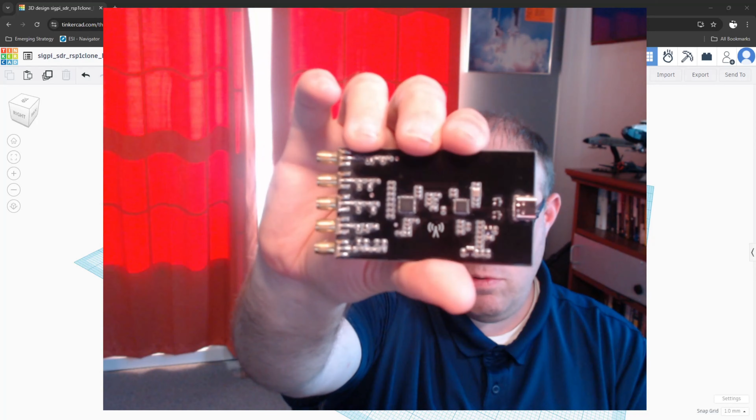So why? What is the reason for the video? Well, this is the reason right here. I bought a few of these a couple years ago, probably on eBay. I think I bought these.

From a specification perspective, you have a USB-C interface, and then you'll notice you have 5 SMA ports, which for this board is receive only. And this board has a lot of controversy behind it.

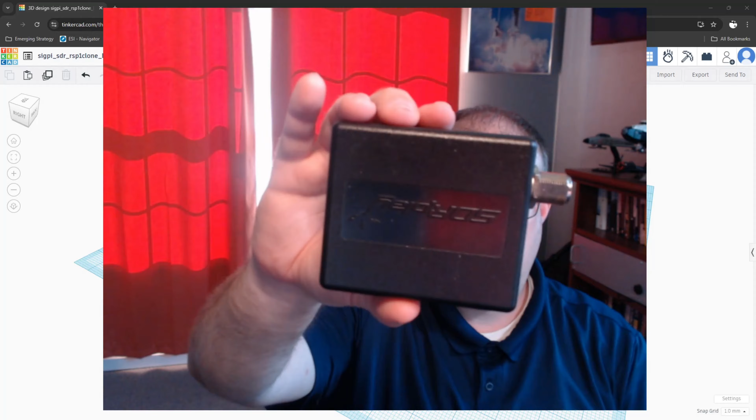And so this all started going back to the SDRplay. This is the SDRplay RSP1. Normally it comes with an SMA connector, but I replaced mine with an N connector, which is a separate conversation altogether. But basically this is the same, minus a few things, as this.

And so this board, somebody released the design freely on the internet, and then somebody in a particular country copied it, and then they took a copy of that schematic and used it as part of an academic project. And so I think while it started life in the best way possible, it has developed a bit of a cult level of annoyance, which I agree with, and I'll get into in a second.

But in order to simplify the costs of this, when this was still in academia, I believe what happened was they designed this as a teaching tool. And so the reason why there's 5 antenna ports is that this proved a great way to show about bandpass filters.

And so each of these strings of — let's see if I can get up in here. Yeah, you can't really see it too well. But there's a row of inductors and capacitors in here, which forms an LC network known as a bandpass filter.

So each of these ports can only receive signals between the parameters of the bandpass filter. So this top port will go from 120 to 250 megahertz, 250 to 1000, 50 to 120, 30 to 60, and 0 to 30 megahertz.

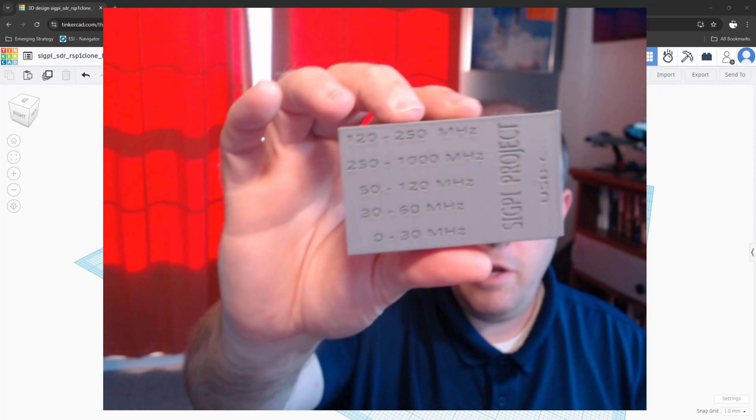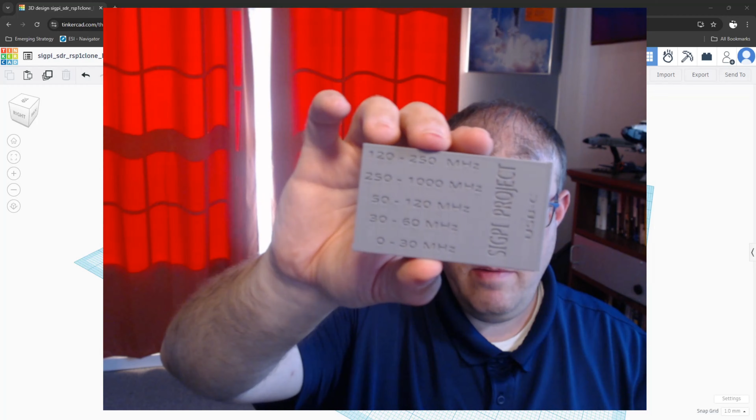In this case, I used Tinkercad and I 3D printed them. Ultimately, I got a really nice design, and I'll share it. Here's what I came up with. It's a two-part design, and I'll show you some tips and tricks in the 3D printing design process that took me from a raw board to having a case for my multiple SDRs. So let's switch over to Tinkercad now.

Turn off, there we go. All right, so...

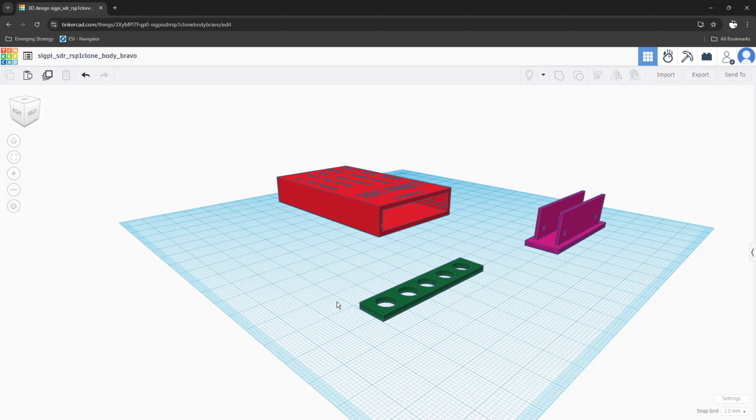Having designed lots of things in CAD, I wanted to make sure I took accurate measurements and didn't want as much waste in prototypes. So I really thought about the board itself and what was going to be most complicated. I thought the thing that's probably going to be one of the two complications is the SMA connectors. So when I took measurements with my caliper, I noticed that each of the SMA connectors was not 100% lined up.

This is pretty typical within any electronics design. Nothing's going to be within 0.0001 millimeters, right? One or two of the ports are going to be slightly off, and that's not a big deal. I just needed to make sure I accommodated that in my design.

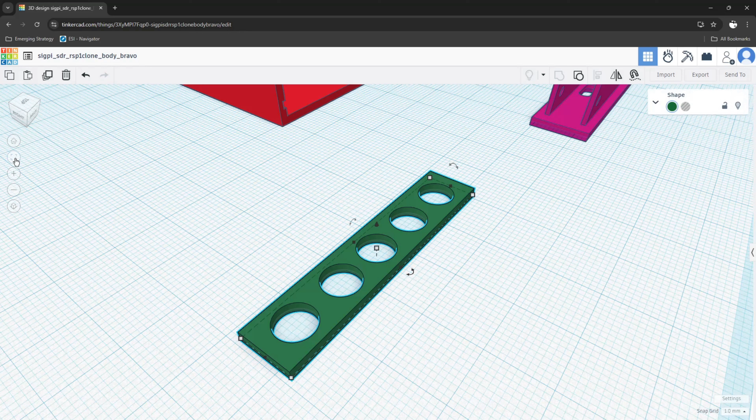So instead of making each of these holes 6.5 millimeters, I made them 7. This way it gave me enough slop between each of the different boards, so I can make one case and know it's going to fit a multitude of boards.

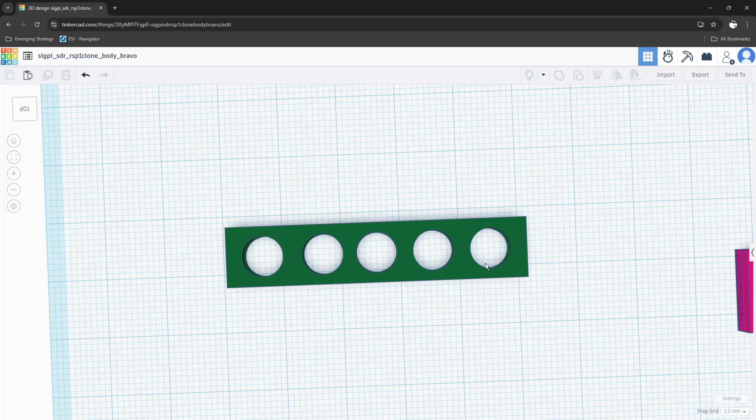In my case, I have 4 of these, so I was able to model this correctly, and this would save me a lot of hassle later on. This was the first thing I designed and printed, just to make sure this was going to fit over all 5 of the SMA connectors.

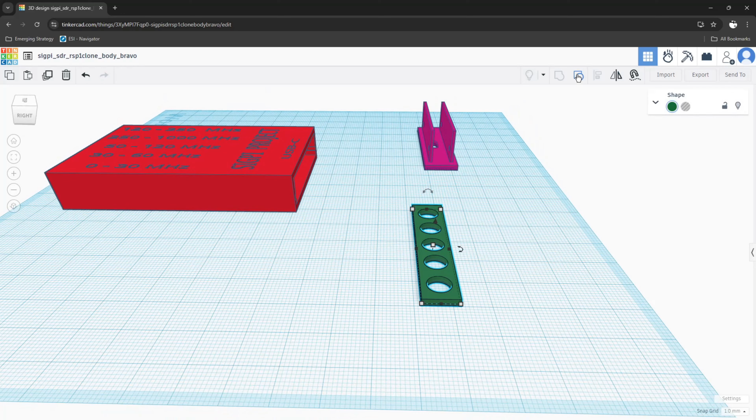And so if you're new to 3D printing, here's how I did this. I'm just going to click up here and show you the feature called the hole tool. We used shapes - let's see if I can show shape. So I created a rectangle.

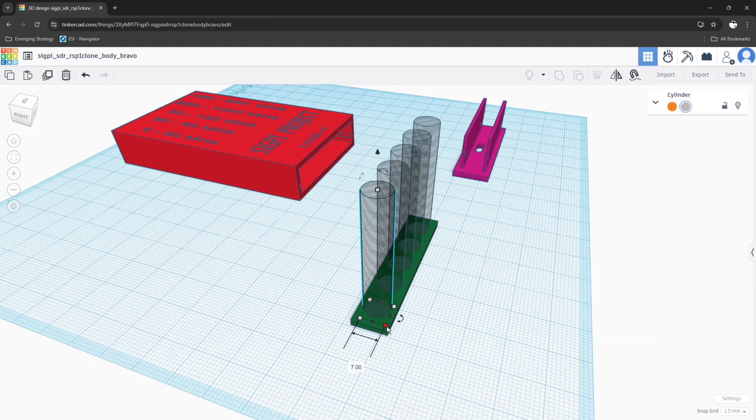Here's the dimensions, 50 millimeters by 10 millimeters. And then here's the dimensions for the holes - 7 millimeter round. And then all I had to do was space them on center. So let's go here.

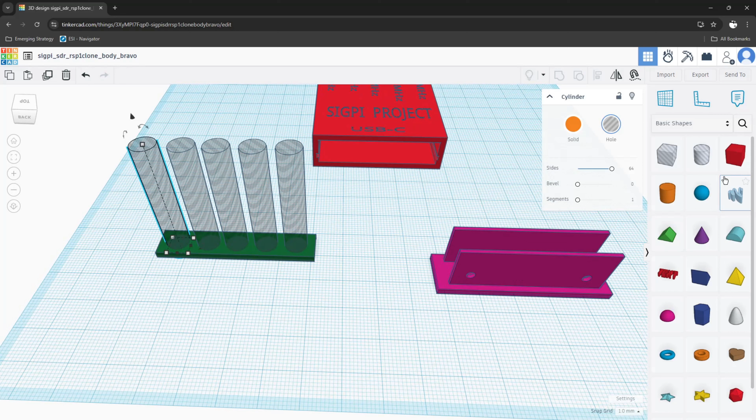If you already know about 3D printing, you can skip ahead. But if you're curious how to do this stuff, if you're new to 3D printing, you might pick some things up here. All you do to start is drag over a rectangle. You could specify the size - in this case I knew I wanted to start with 50 by 10 millimeters. I wanted to make this 2 millimeters tall, and you can see that's that.

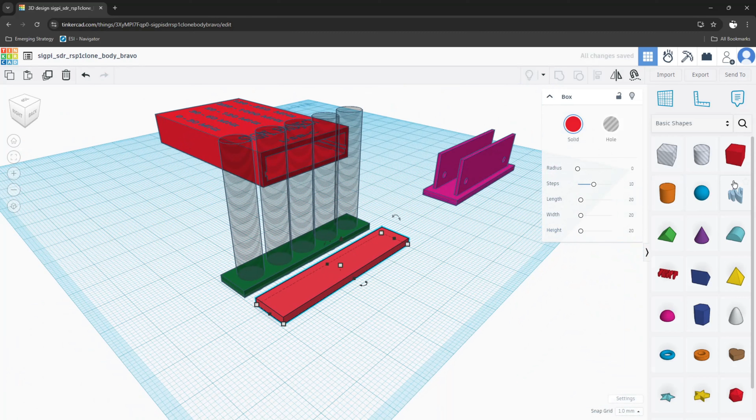And then all I had to do was use the circle tool - you could either use the hole or solid, it's all the same. See, like that. So you just make it to the dimensions that you want, you can make it more round, and then you just put in your dimensions like so.

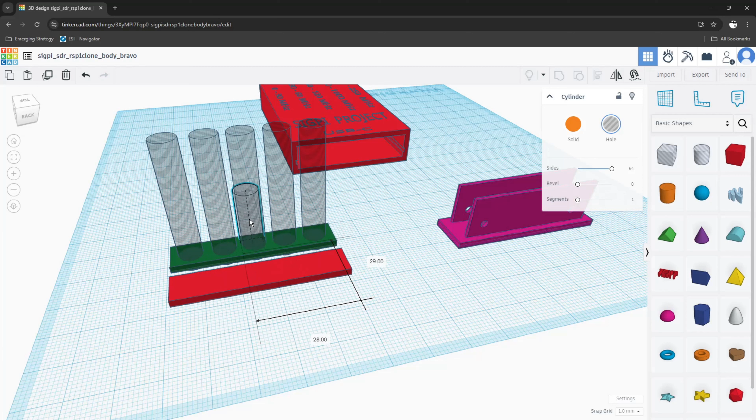And then you just space them out. In this case I needed to make sure they were all roughly the same space on center, so I did that with a caliper and measured everything. I also used the ruler tool here - let me clean this up a little bit. So I use the ruler tool to see the spacing. You can see each one is 7, and from the edge I went 1.5 millimeters, and you can see how this is all lined up correctly.

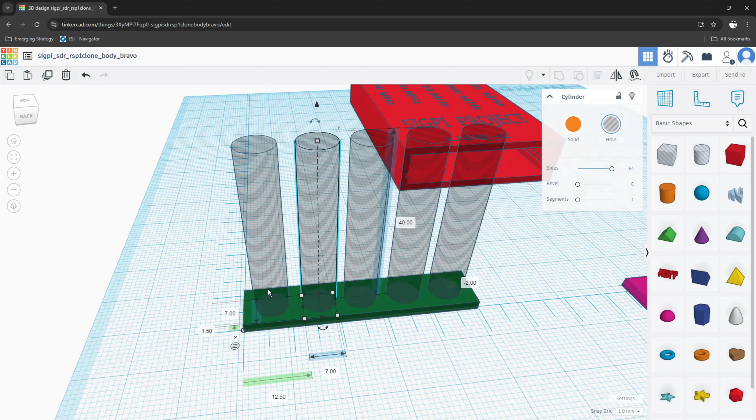So I spent a little bit more time designing this to know it was going to save me some grief and headache at a later time. This was the first thing I printed, made sure everything fit perfectly, and then I moved into the design of the actual case itself, which is right here.

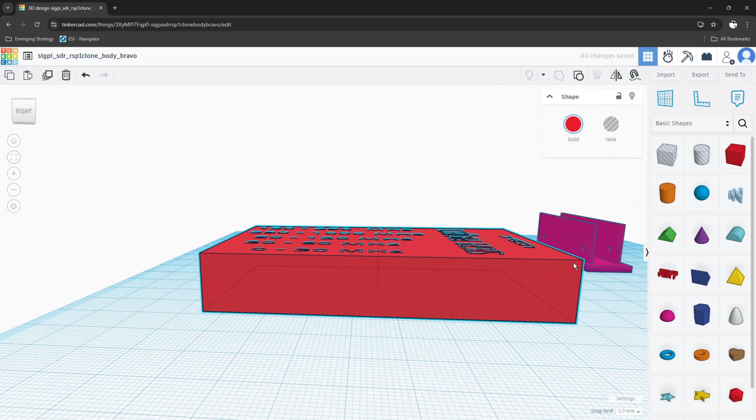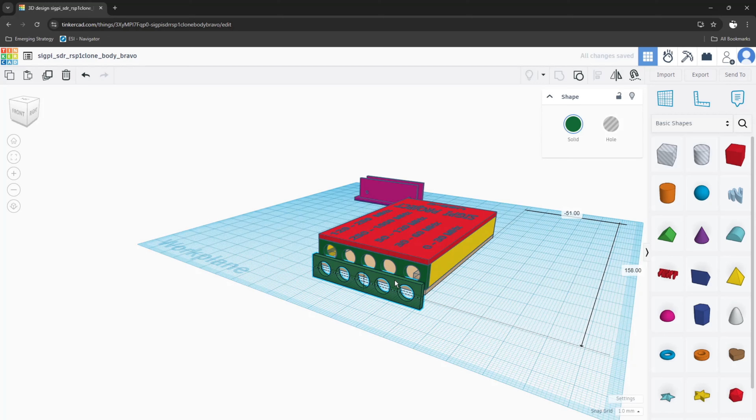When I designed things, I found it easier to do this in multiple pieces instead of trying to do it some other fancy way. I'm just going to ungroup everything so you can see what I did. You can see I have the SMA connector here, so it's as simple as giving it a rotation and then just dragging it into place. So that's basically how that works.

And then I use different colors for different parts just so I could visually contrast them as I'm fitting them together. So you have the bottom plate and the top plate, and then the two side pieces. Pretty easy stuff.

You have 50 millimeters by 83. The board itself is actually 80 millimeters, and I'll tell you why I had to add 3 millimeters later in the design process. But yeah, this should all be pretty self-explanatory.

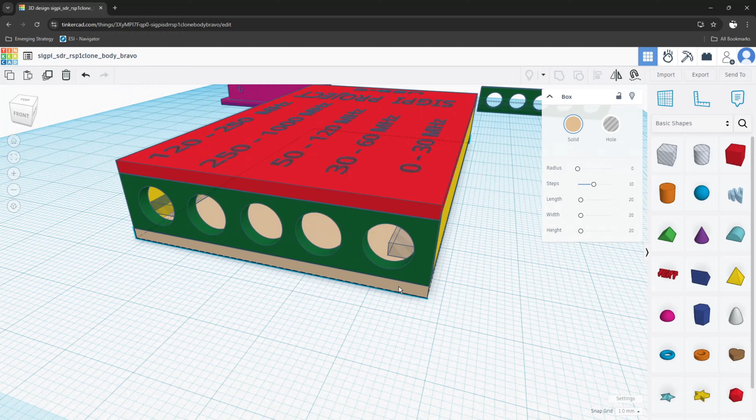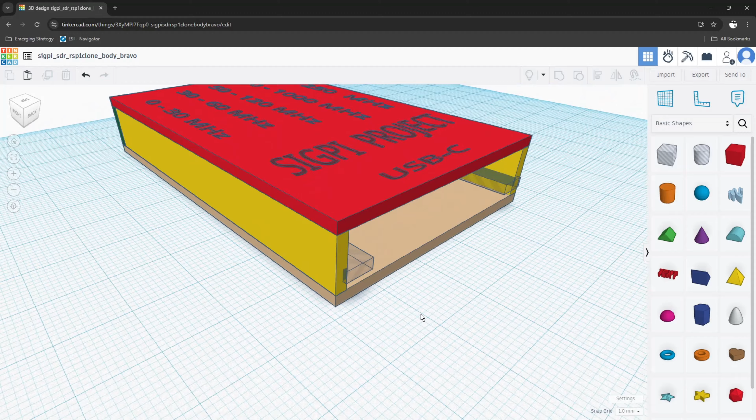If you're new to Tinkercad or CAD in general, I like using Snap to Grid. It lets you line things up really nice, so you make sure all your edges are exact to where you need them. So again, pretty basic stuff if you're into CAD already, but don't overlook it - you can do a lot of cool things within Tinkercad.

And then the other thing that I needed to do was add in some indentions on the side. So the way that I thought about it was the board has a little bit of extra side, and I thought I could just get them to slide right in. Let's see if I could zoom in here.

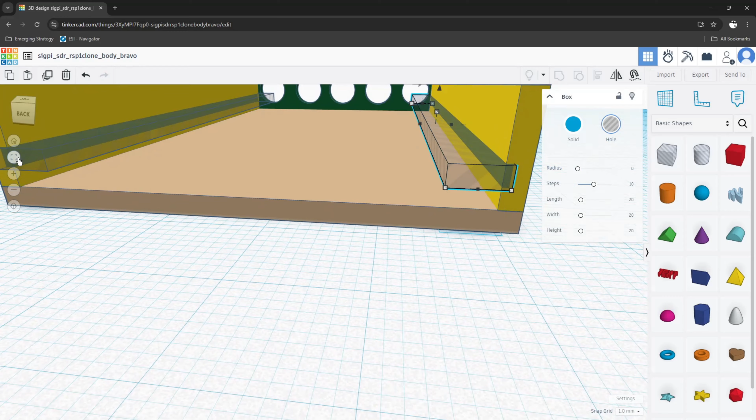So I fit these little side rail pieces, and then what you'll notice is I don't have the side rails going 100% right to the front. The reason why is that I needed to actually have a little bit of space, so when the board slides in, this little gap has enough for the back end of the SMA connectors, and then it gives it enough friction for me to push the board up against it.

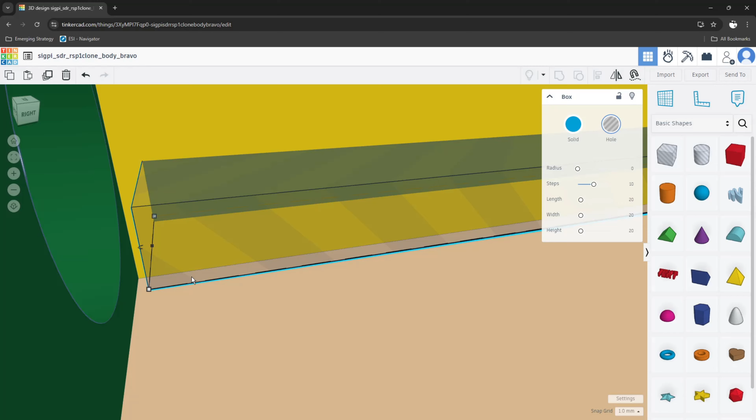And I didn't want to use screws and make a complicated case design like some of the ones that you can buy. So this is all a lot easier. And I actually had to print out a couple iterations just to get the spacing just right, but I think that was worth the time. So that's how the case came together.

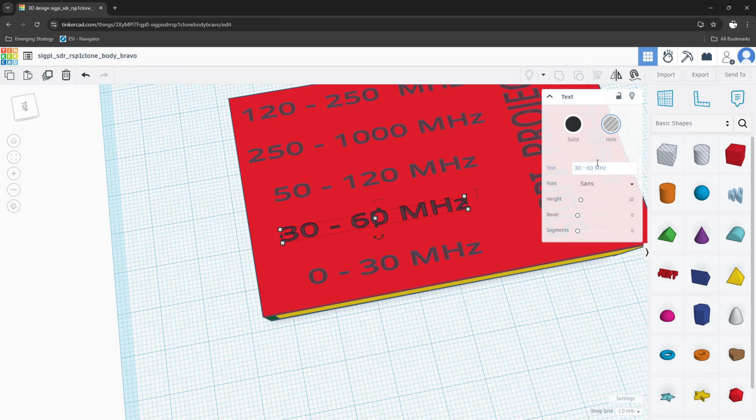And then finally, I decided to use the text tool in Tinkercad to add labels, and all I did was type it in and use hole instead of solid, so this way when it prints it's just negative space. I figured I'd just do this case in one color versus two, but hopefully this gives you an idea - nothing could wear off, and so I labeled everything correctly per the SMA ports.

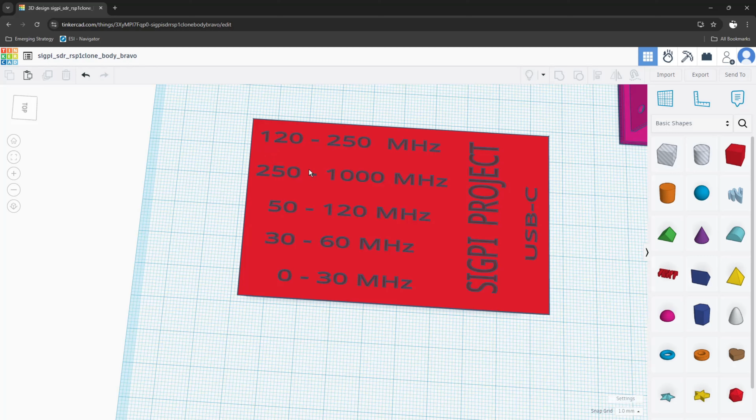So yes, the frequencies don't go in order, but I think because there was more of a complication in the filters, that's why they had to flip the RF chains on the board. So this is correct. This top row should not be 250 to 1000. It is correct - it's 120 to 250, then 250 to 1000, then everything else goes in order.

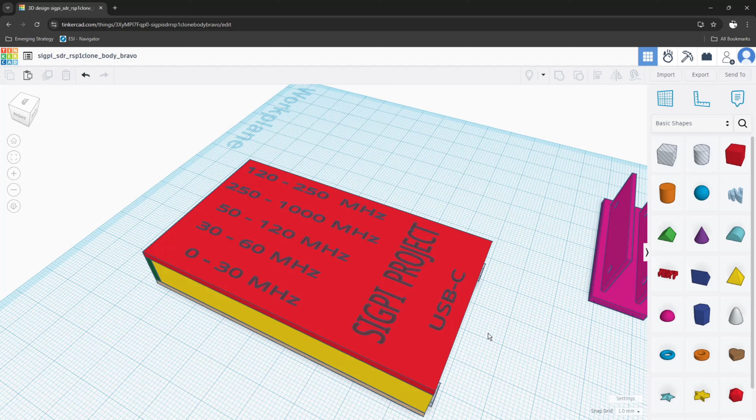And then I figured while I'm doing it, I'll put USB-C here, and myself and Joe, amateur radio call sign NE2Z, we collaborated on a project called SigPi, which uses a Raspberry Pi with some fancy compilations for popular SDR and related apps for signal intelligence, such as SDR Angel.

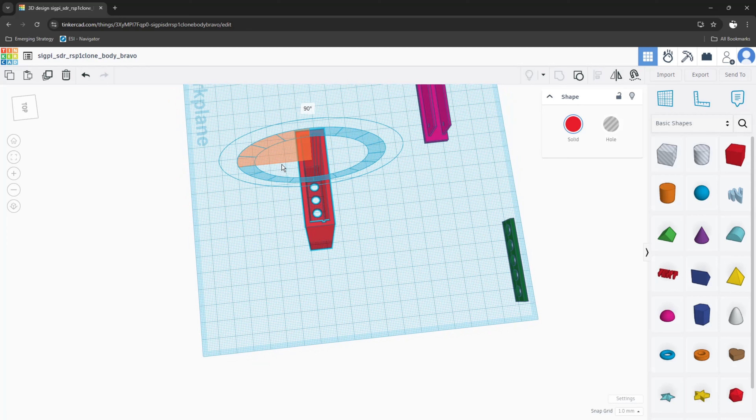And so I figured, whatever, we'll brand it and make a case with the SigPi project on it. So that is the case. So let me merge that back together. Group - all right, so that's all one piece now. I'll just rotate it back in here like that. So that was the next thing that I needed to print.

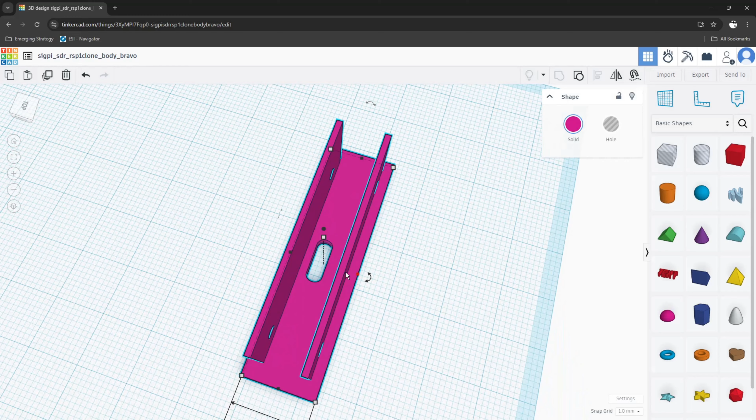And then the final piece is the end cap. This was a little complicated, but not too much. And the nice thing with standards is the USB-C port is a standardized size, but I needed to actually make it a little bit bigger to adjust for some tolerances on the board and connectors. So just to show you how I did this, I had to create a complicated shape.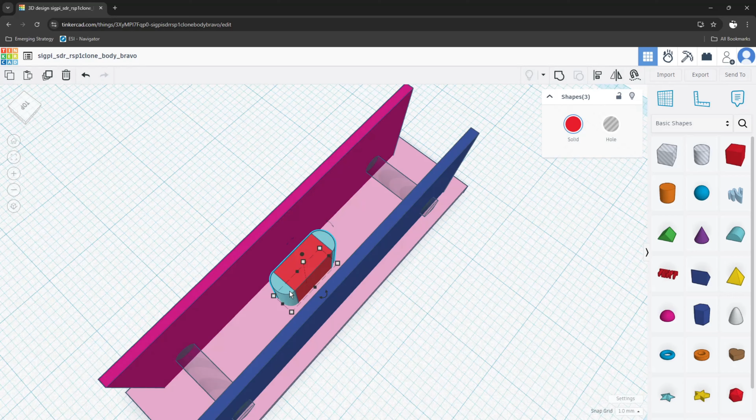And that actually came in the form of 3 pieces. So I did the square rectangle tool here, and then I used the round roof piece, and you could see that I built those together, merged them as a solid, and then I made it into a hole. And so that's how I got the dimensions.

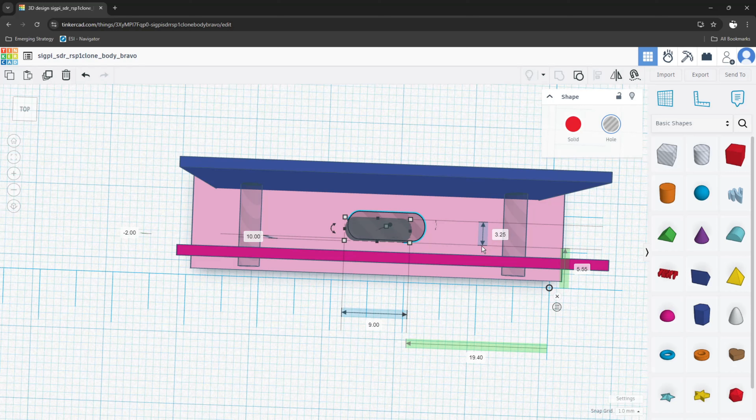And let's see, if you're wondering the dimensions, I will show you the dimensions. So I went with 9 millimeters and 3 and a quarter millimeters. The spec is actually a little less, but I made this intentionally a little larger to again adjust for some slop in the assembly of the case.

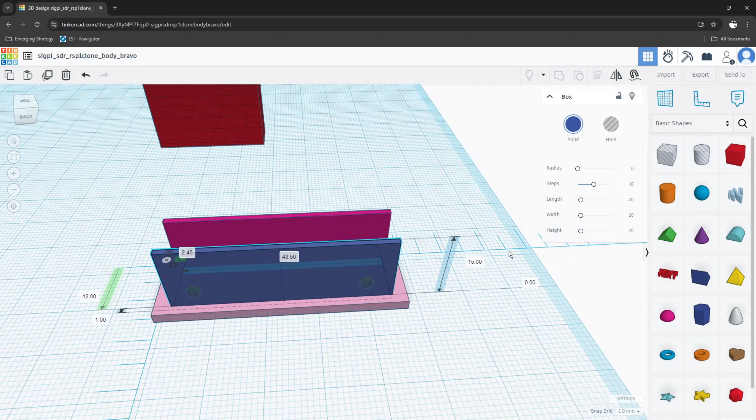And then you see I have the sidewalls, and these I actually started off shorter, but ultimately I decided to go a little longer. And I'll show you all the iterations - almost like Iron Man, Mark 1, Mark 2, Mark 3 - for me to get everything just right.

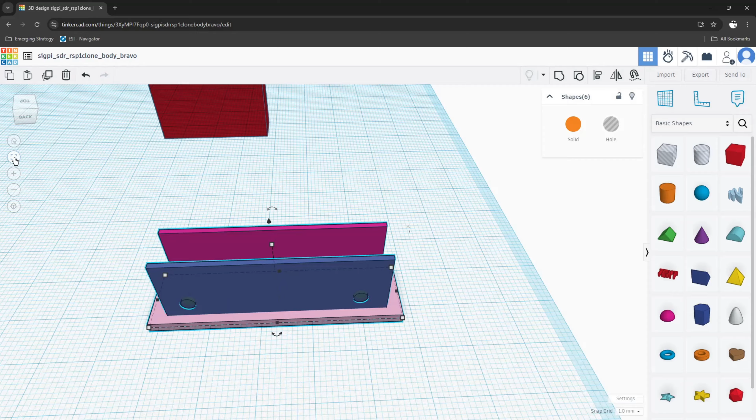But you know, I think having a good process for design simplified the process. It only took me, like, an hour and a half to come up with all the iterations and design and stuff. So we're not talking a lot of time here, but that's basically the design.

And then a feature that I started to incorporate but decided against was I thought maybe what I would do is connect everything together with a screw. So that's why I put these 2 holes in here, thinking that I'd slide the plate into the case, which I'll show you.

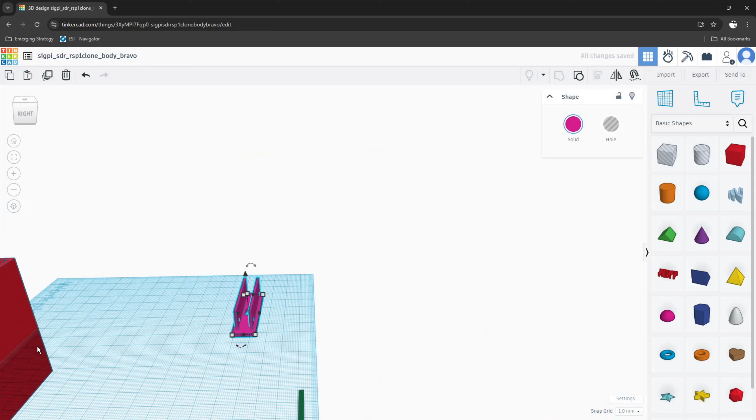Let's see, yeah, so we'll just rotate things around 180, move this up here. So my thinking was maybe I would put some holes in the case and in this, and then use a screw to hold them together.

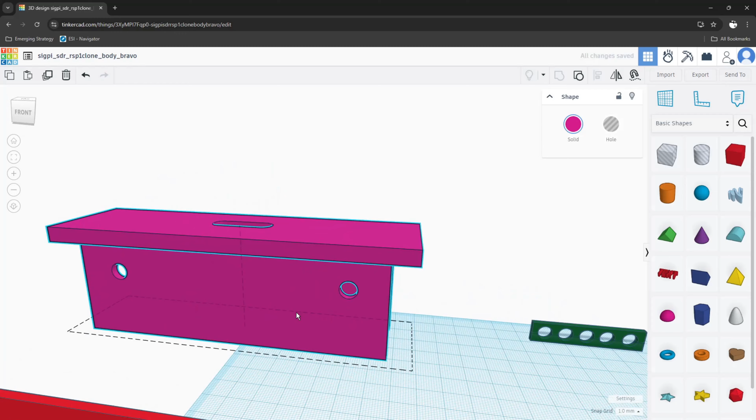But I started to think that just is getting complicated. I think once I put the piece in here, I'm just going to glue it in. There's no reason to service the board itself, and so everything would just fit right in. Let's see if I can get it in here.

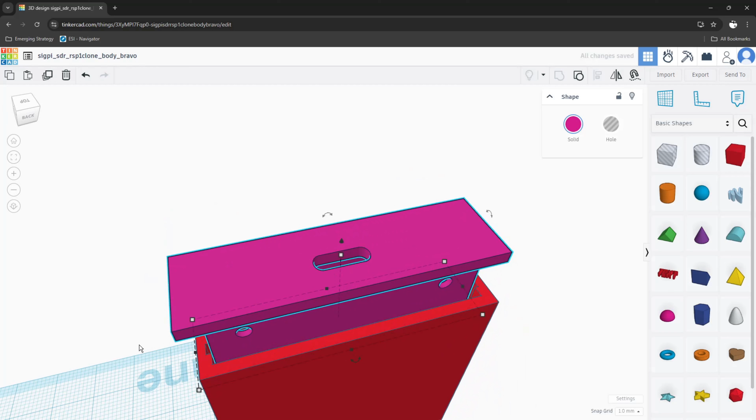One thing you'll notice is that I have a little extra space here on the side, and this is just due to tolerances for the different SDRs themselves. I added that in just so it can move around a little bit, since each one is slightly different. But overall, I think this came out pretty nice.

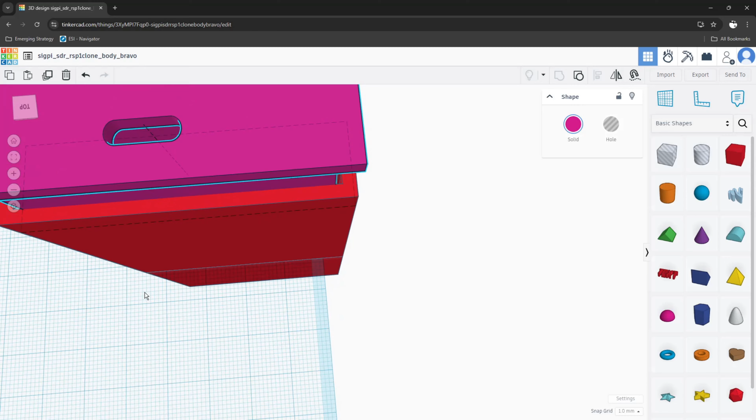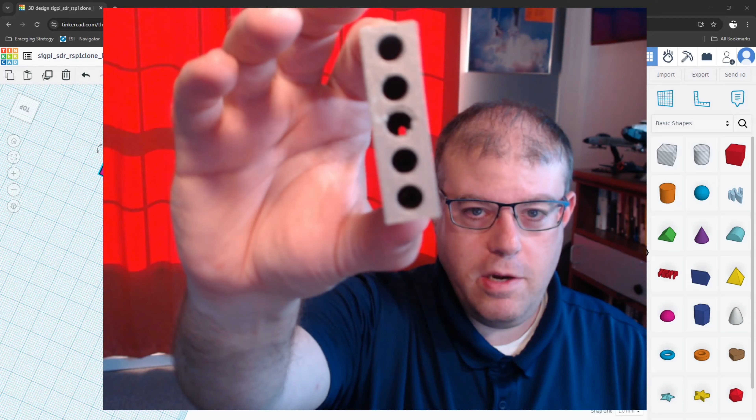Now let me show you the final product, as well as the 1, 2, 3, 4, 5 iterations that I have. So here was the first version. I pulled it off my print bed too quick because I didn't let it dry. But whatever, this was just meant as a test.

And then I had to play around with the size of the USB. So this was actually a little too tight, so in the later version I made that a little bit bigger. But you can see this is where we started with, so it's filament waste number 1.

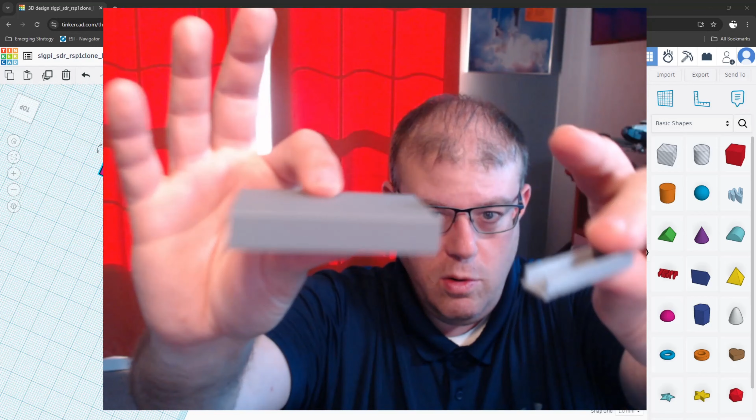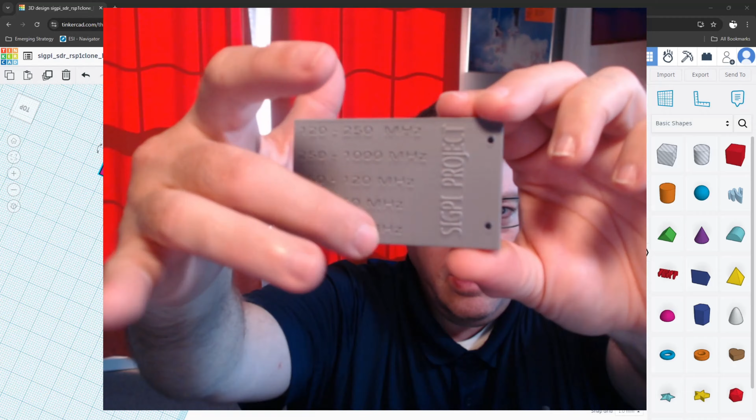Then we go to filament waste number 2. This I just wanted to experiment with what it would look like, so I wanted to check and see should I maybe go with the raised text. You can probably see that that's raised, or embedded. So I just wanted to test that, and you can see here I have the early test with integrating holes for the end plate, which I ended up not wanting to use.

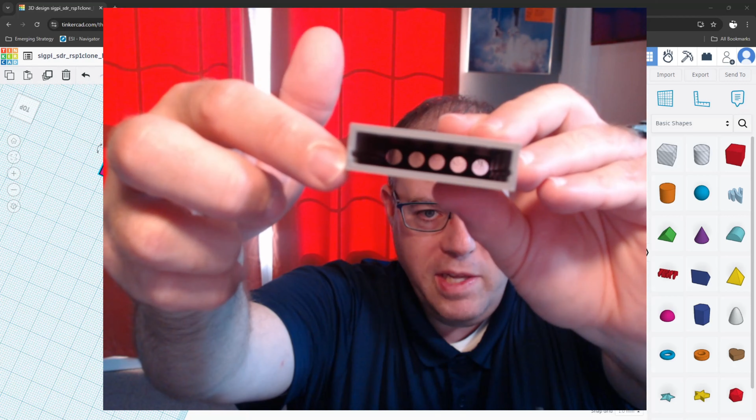Also learned in this iteration was the side rails. I had to change some of the spacing, so I was off by about 0.75 millimeters. So I raised that up a little bit in the next iteration. So this was waste number 2.

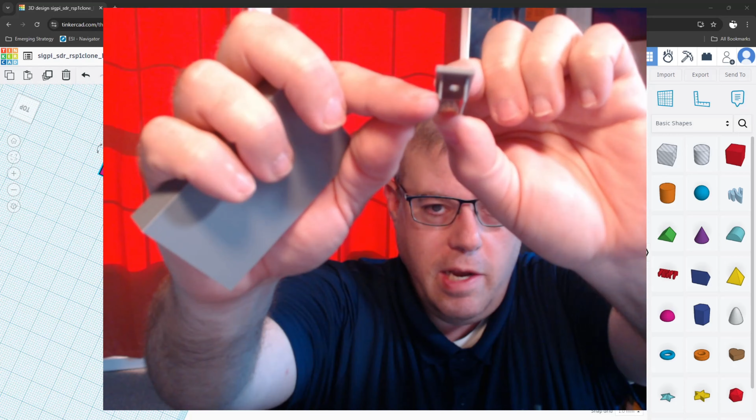Then we want waste number 3. So this is where I learned to make this bottom piece. This was 10 millimeters. I ended up going with 15 on the final design, but otherwise this was just a blank case like that, and you can see how this just kind of slides right in there.

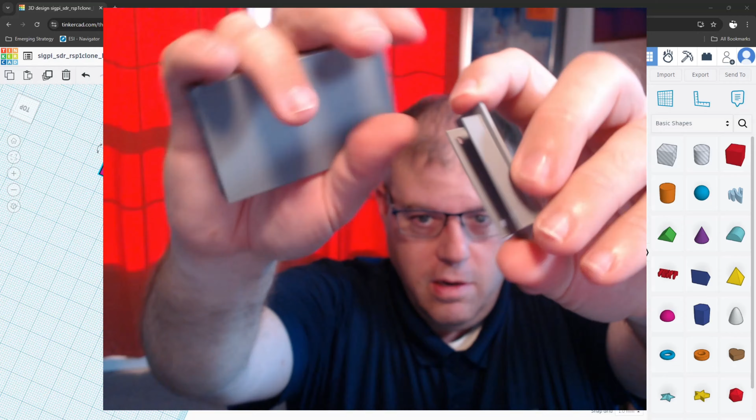And I wanted to reduce the give, so I shrunk that on the next version. So this is waste number 3, and then you'll notice that I did a little trimming with some cutters. So yeah, this was waste number 3.

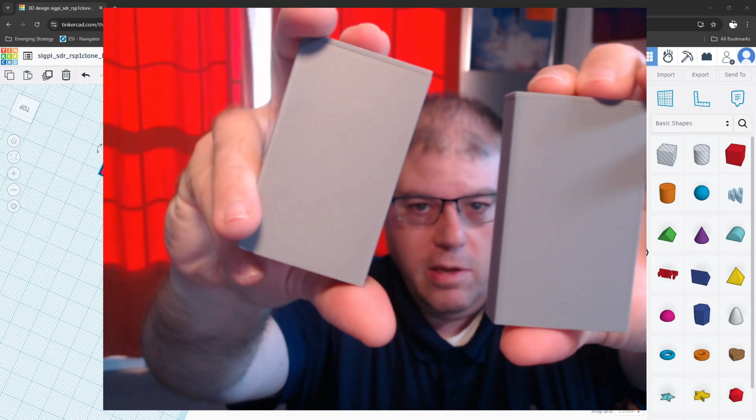Then we have version 4A and 4B, which are identical. So this is the near final version. You can see how I think this came out pretty nice. And this uses the—

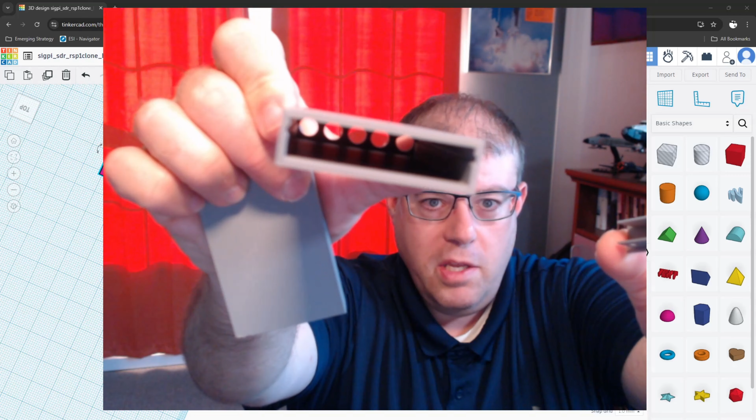there we go. So this is the shorter side, right? So this works pretty good. I just really wanted to make sure that I got those side rails designed in there pretty nice. So that was these two, just to double check everything.

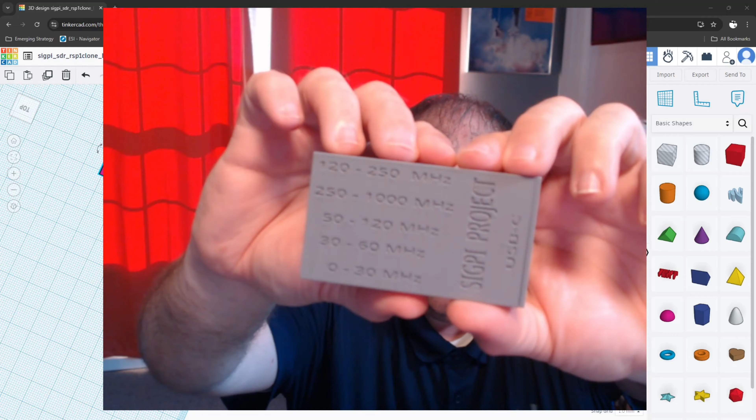And then finally, here's the final version. So it came out nice with the embedded text. I did this at a smaller layer, knowing that it would take longer to print, but it came out pretty nice. I added USB-C as well as the project, the SIGPI project that you saw in Tinkercad.

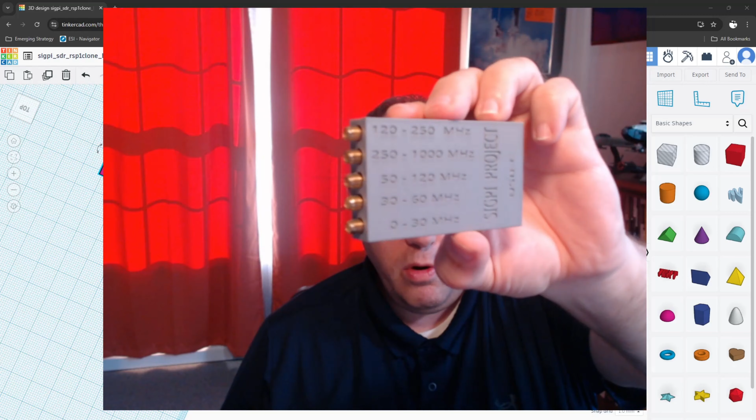And then here's the extended piece. And there you go, so here's the final version with the board installed. And with the USB connectors, I had to also try a bunch of different cables just to make sure that everything was fine, and everything seats in there pretty nicely.

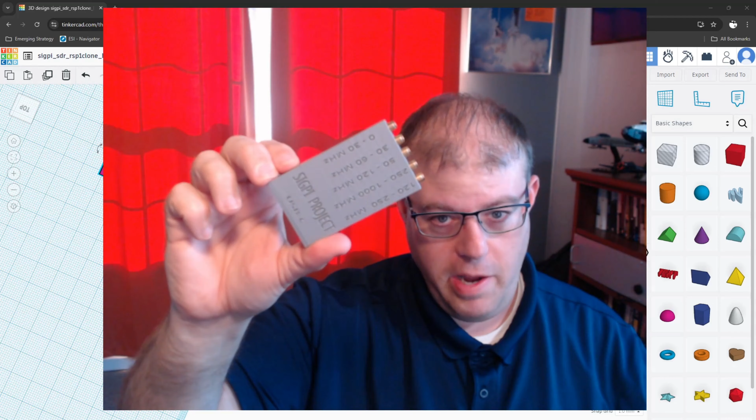And again, the goal of this video was just to take you through my thought process for the design of the case. I'm not encouraging people to buy this. Don't go online and buy this. I don't want to hear the complaints. If you buy it, you're on your own.